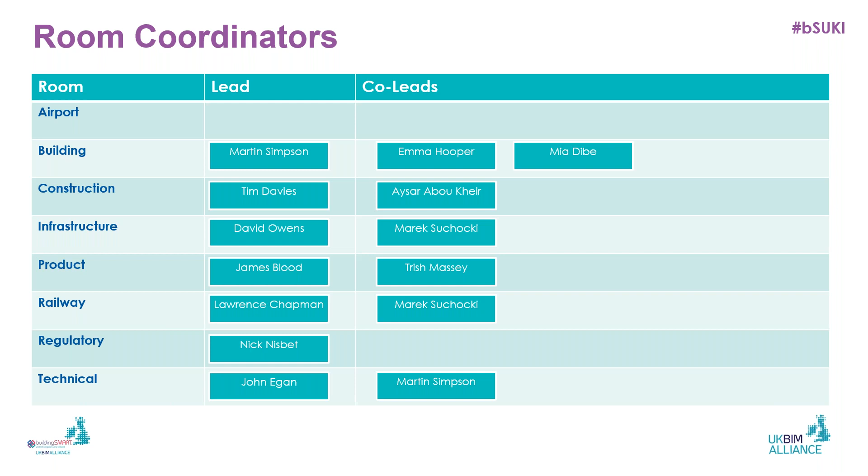As I mentioned earlier, the airport room is currently lacking a coordinator with any specific experience in airports, but we will assign someone internally within the committee if we can't find anyone new to join us. So with that, I'll hand over to Peter, who's going to give us a case study on the HS2 Euston Tunnel.

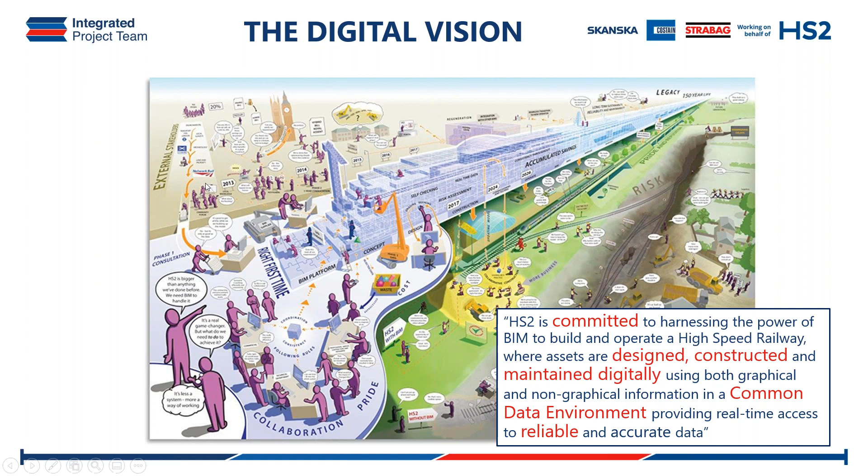Here's their strap line, which is in the bottom right here. It's got some of the buzzwords that we use, but essentially we kind of boiled it down to: we want to utilize BIM to increase productivity, reduce waste, and leave a legacy.

So specifically on this project, because of its size, we're probably running it more like you might do as a company. So we actually came up with some high-level strategies that we would like to achieve on this project, hopefully aligned with what our parent companies want and what the UK government are requesting as well. So we've just distilled it down into 4 to make it easier for ourselves, things we target, benchmark ourselves against, and measure against.

So one is trying to influence the industry, I guess, with hopefully some best ways. It's why we obviously like going out and doing these kind of events, try and get the word out there, see if there's interesting stuff that we can help with or influence.

And then the other one's about saving money, I guess. So we put on a pretty realistic expectation of a 1% minimum saving on capex, with a 2% target using these digital methods, and a prediction of the OPEX savings. It's pretty hard for us to do that, but we're asking HS2 to help us with that, where we would like to get between 5 and 10. Again, maybe not the highest, but we think they're quite realistic. And obviously, when you're dealing with billions, 1% is actually quite a lot of money.

And then the final one is upskilling for Digital Built Britain. So obviously a lot of what we do is about training people. That's probably one of the biggest challenges that we have. So we put a metric on that as well. We would like to train up our own staff, and especially the supply chain as well. So this strategy helps us to rally around something and try to aspire to be better, I guess.

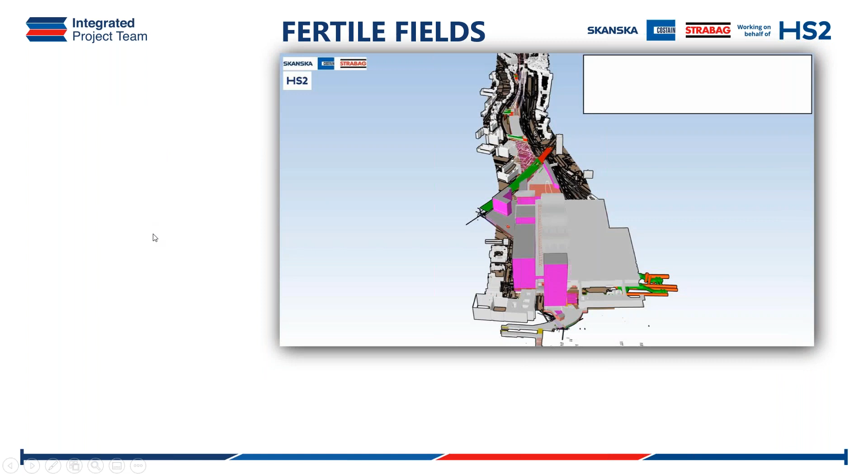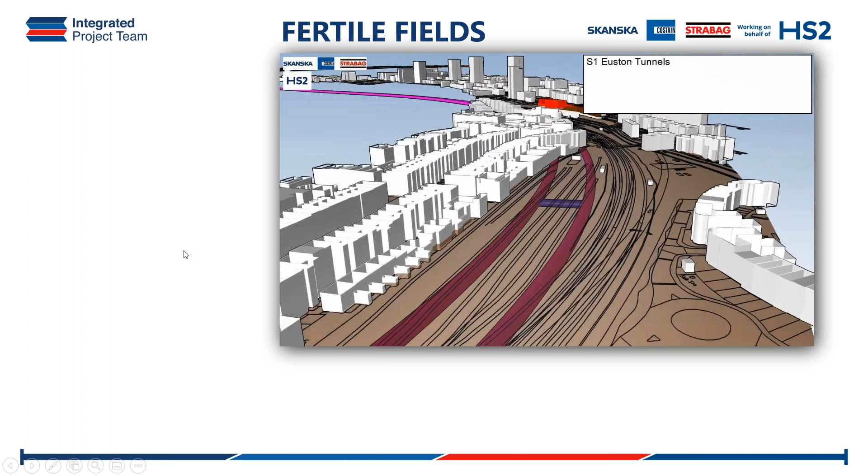So hopefully this will work. Here we go. So here, if this holds through, we produce this, which shows you what we're actually building. So we're responsible for about the first 26 kilometers of the route. It's mostly in central London, so it just comes out of Euston up to about the M25, and here's some facts down there.

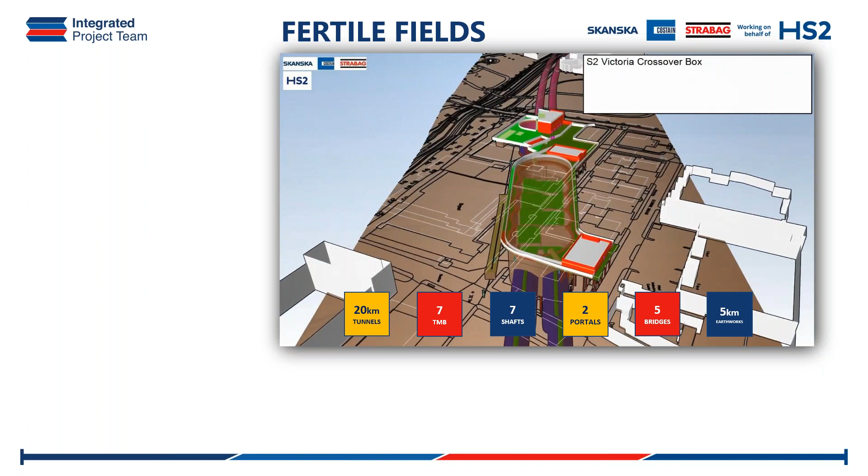So we've got about 20 kilometers of tunnels. That's a mixture of twin bore and SCL. We've actually got 7 TBMs, which is obviously a large amount. We've got 7 shafts, 2 portals, 5 bridges, and about 5 kilometers of earthworks.

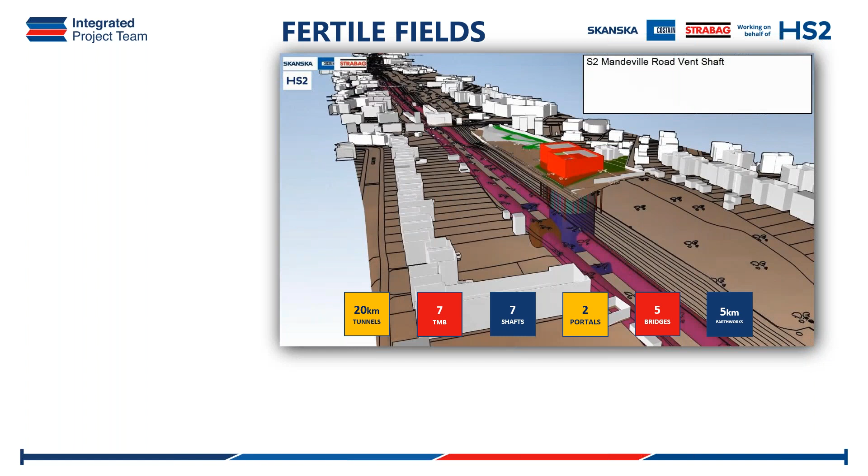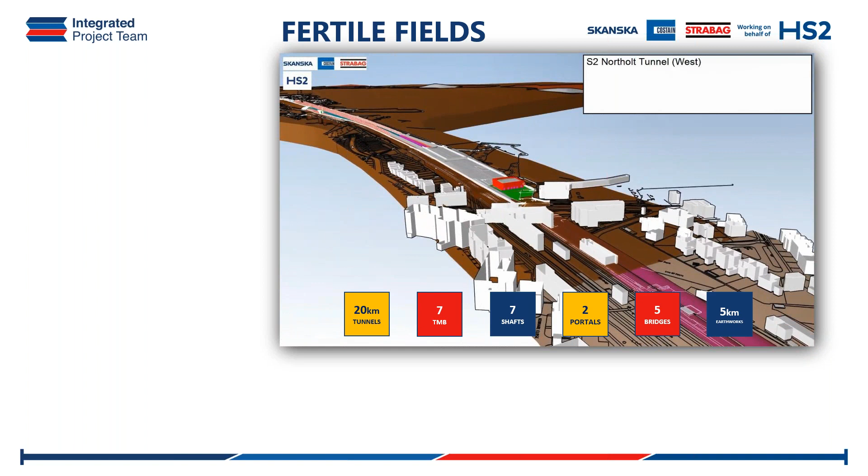I suppose one of the other challenges we have is because we're going through central London, we've got lots of interfaces, not just with the other HS2 contracts. We're kind of part of a big ecosystem, if you like, with rail systems and the stations, for example. But obviously we're interfacing with Network Rail, London Underground, TfL, the councils, and a lot of utility companies as well.

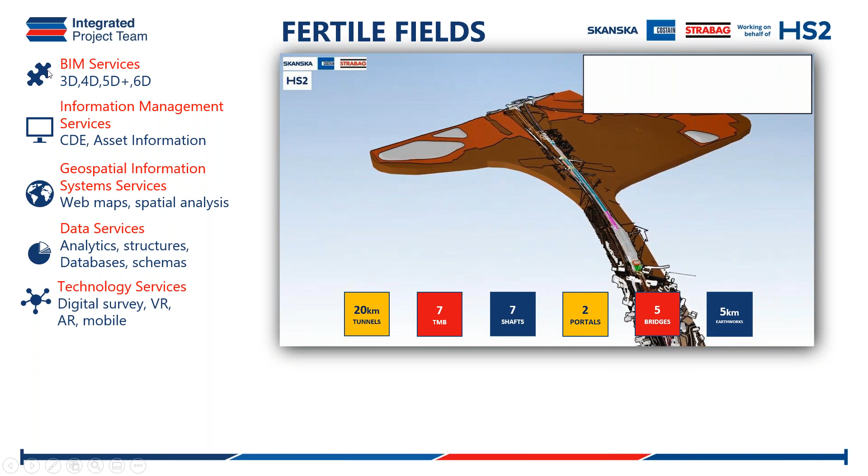And in terms of what we mean by digital, this is kind of our product offering here on the left. So obviously the term BIM can be widely used. So we offer those more traditional 3D, 4D, 5D, and 6D services, if you like, looking after CDEs and asset information. We also have got a really good GIS team. We won't go into too much of that today, but that's really helpful to us, especially in a big linear infrastructure project.

And then we've been investing quite a lot of time and effort into these data services, which I'll hopefully be able to show you a bit later, which is how we manage databases and analytics and stuff like that. And then also the cool stuff like VR, AR, and also mobile technology.

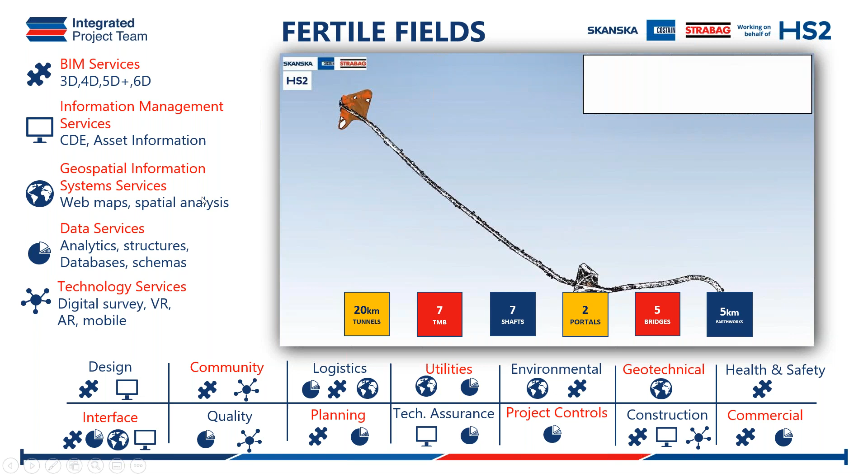And I guess it's a big project, it's a big team, as you've seen, and all of these different services basically can assist all of these different teams that we have on the project. So maybe when we think about BIM, we might think it's affecting design and construction, but for example, maybe not so much about quality in the field or project controls. So I suppose it's just trying to represent a global effort, and hopefully we can influence and help all these other teams achieve their goals.

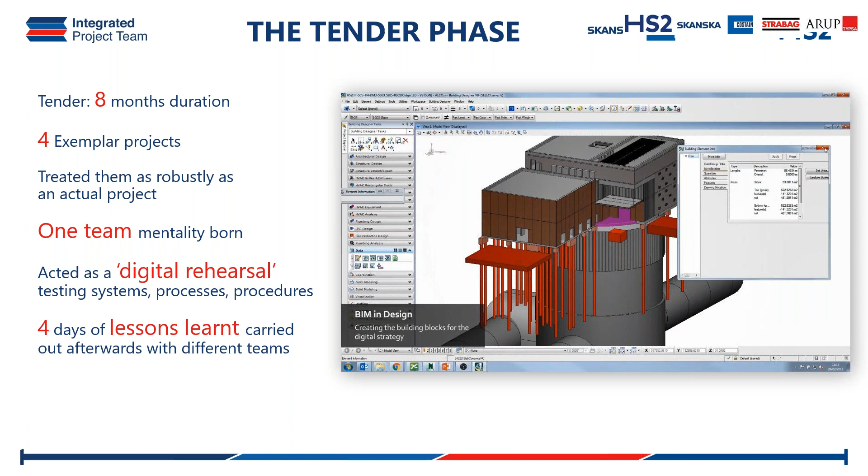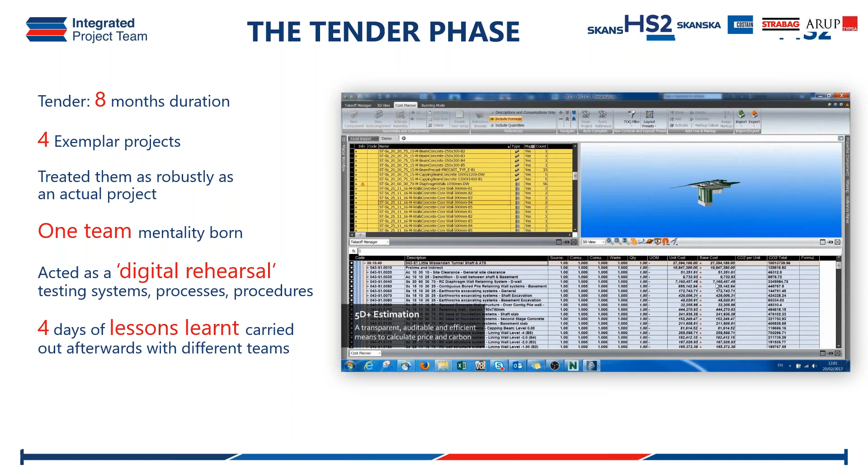So as I mentioned, I've been personally on this project for a long time, and we produced this video as part of our tender response. That was probably about 4 years ago now. If anyone's been involved in a tender, we were quite lucky, we were actually able to test quite a lot of what we wanted to do during that tender process. And then we've been able to learn some of those lessons through 8 months of tendering, essentially, and deploying them on the job. I think that was a really useful time for us to learn in a controlled environment. So what I'll show you a bit later is just an extension of what we trialed back then.

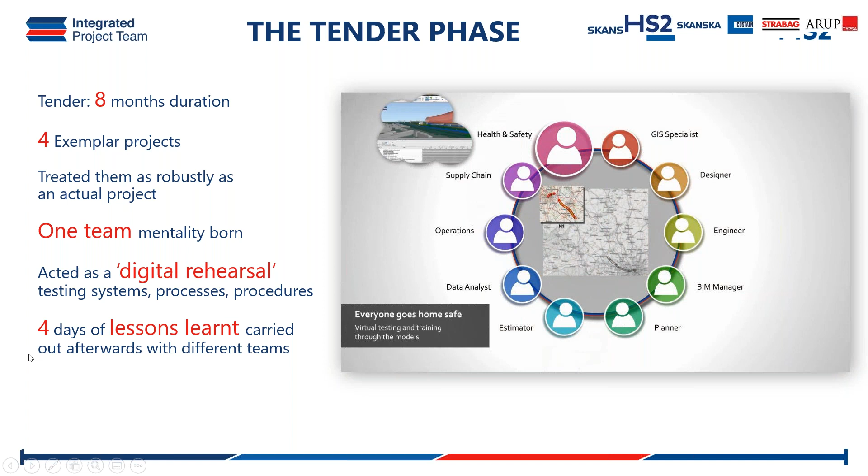Hopefully here you can see it was a joint effort with lots of different team members being part of this, and we tried to get a good one team mentality during that tender. From my point of view, what was maybe most impressive, we actually carried out 4 days of lessons learned afterwards, which was tiring and time consuming, but we basically worked out what we wanted to do before we got into contract with HS2, and we were able to execute that before we started officially. So it gave us a bit of a jump start, and that was really, really helpful to us.

In terms of authoring tools, because it is a rail project, we are using quite a lot of Bentley tools. They're pretty standard, I think, due to people using Power Rail Track for the alignments and stuff like that. So we have kind of aligned ourselves a lot with that. But obviously, we've been using the IFC format to drive a lot of our downstream processes, and I suppose that's kind of maybe a bit unique. Not sure if so many other people are doing that.

We use a lot of basically configured information, if you like, which is housed within our CDE, to make sure that all of this information produced using these tools is very consistent. I'll explain a little bit about that later.

We also use a lot of this product called FME, which is an ETL tool - that's extract, transform, load - and it's a super useful tool for doing clever stuff with data or geometry. I don't know if people are too aware of it, but we use it a lot on the project, and we've seen many, many benefits. You can see some amazing cool stuff with it. Definitely recommend everyone try that out if you haven't.

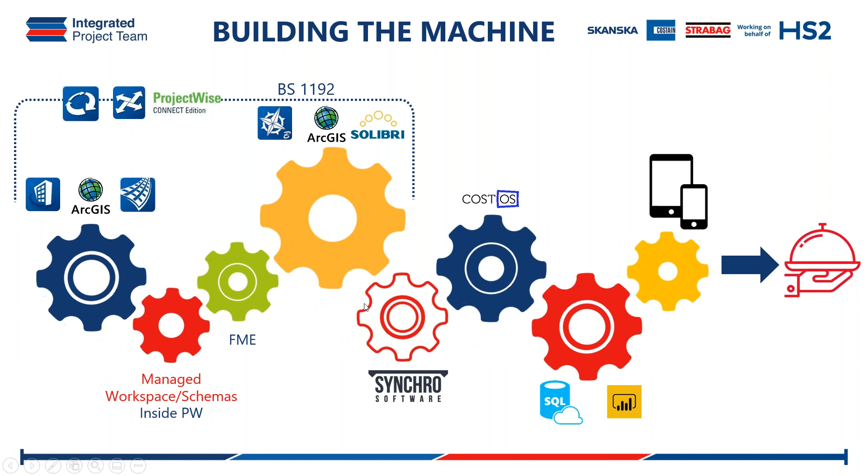Cool, so just a quick slide. When we were setting up the job...

We worked quite a lot with our IT team and data architects and systems architects. If you want to really align structures to do effective reporting or integration, you really need to configure many systems so that they have common structures. So we spent a lot of time at the beginning of the job as a group trying to come up with those common data structures. And it's not just about design or engineering, it might be about commercial, or your document management tool, or your timesheet management tool, or the way you do your accounting and stuff like that.

So won't go into too much detail, but we spent a lot of time as a group going outside maybe your traditional BIM sphere, so that we could make sure that when we tried to integrate with other systems, that was effective later. For example, that's your estimating system or your P6 for your program as well. So yeah, that's a complicated piece of work, but definitely worthwhile that we found.

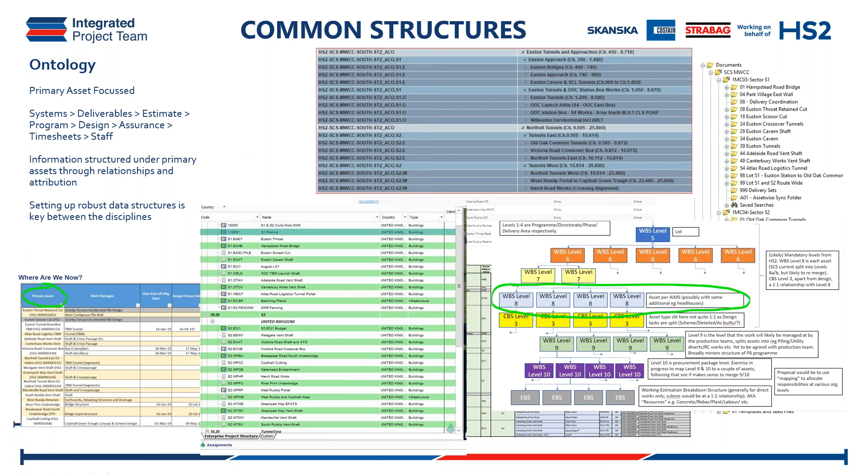Okay, so when you start off a job, it's not all looking great, it's quite boring at the beginning. HS2's, they just had their standard EIR like you would expect. That probably was one of the most onerous or challenging set of requirements that I've ever witnessed. I've been working in the industry for quite a few years now on big other blue chip clients, and HS2's requirements certainly are very challenging.

That's why we've had to develop all of these things and do all of these things, because that's what they asked for as well. Obviously then we wrap that up in one of our several BEPs that we have. This one is interesting - we actually did this as a joint effort with our design house, because we thought that was a bit more effective in working like that.

We kind of worked out this through the MPDTs, this very structured approach, which we implemented on these other systems that I mentioned before, where we moved from our assets down to our model items, down to our elements as well. And what we did then, which is maybe coming into the fore in rail a little bit more, but maybe wasn't so common before, is creating our component library.

So those sort of Revit users or people working in oil and gas are very used to this, maybe not so much in some other linear infrastructure, but we realized that if you wanted to have very consistent information, you couldn't just let people run amok basically. So we configured a library of parts, if you like, or specific components, which we could then control that information really consistently.

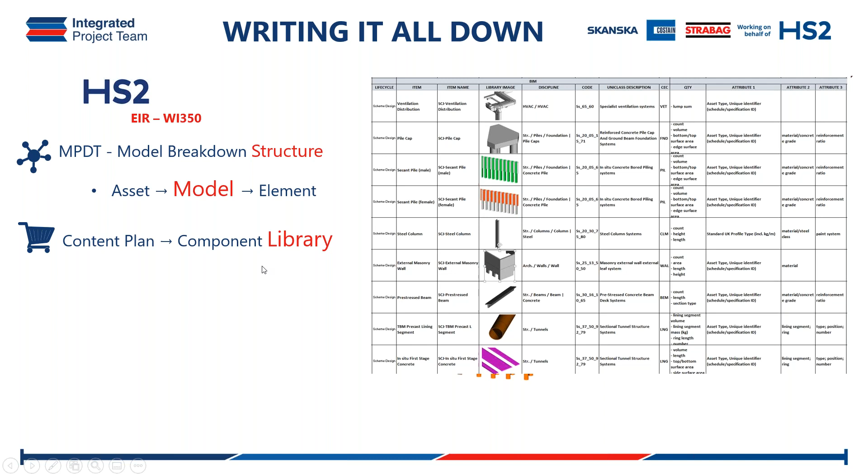And then we did the standard things about the LOGD, and we also came up with these extra attributes that we knew we would need for downstream processes as part of an extended LOI, and we use the extended property schema basically on the IFC. So we control this schema in our own systems, and that basically gets burned in as another table in the IFC schema. These essentially allow us to do some extra linking, and it's to do with the HS2 requirements as well, so that's been helpful to us.

Then that was wrapped up in some guidelines, it's like a manual, if you like, to make sure you're doing things in the right way. The design house did that, which is great. And essentially it ensures consistency, and that's really the key word for us. If you want to automate anything, then your data needs to be consistent, and maybe historically it hasn't been, and that's why we've all struggled maybe to do some of these more interesting things that we can do.

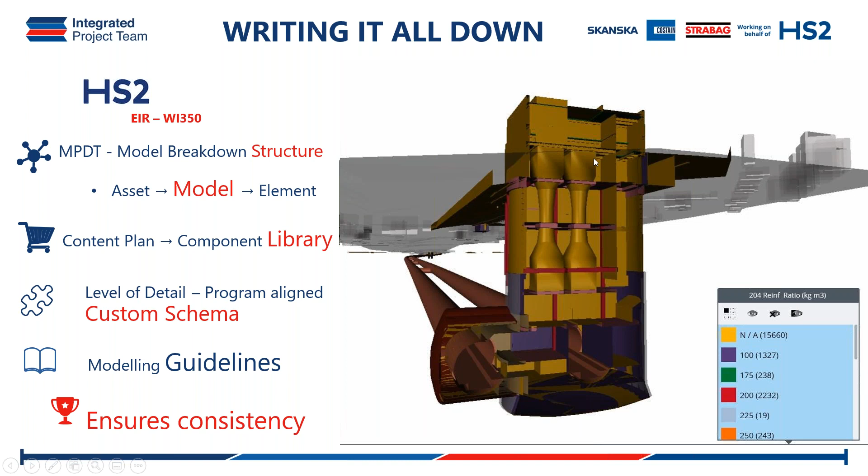So hopefully that allows us to have a nice looking model. It looks great, but obviously it's full of really useful information that's useful for the teams. And this information is really what's driving a lot of our processes, and this is what's useful. The graphical side has its own certain life cycle, but we've realized that the information is really what's valuable here.

So we spent a lot of time basically making sure that this data was correct, essentially.

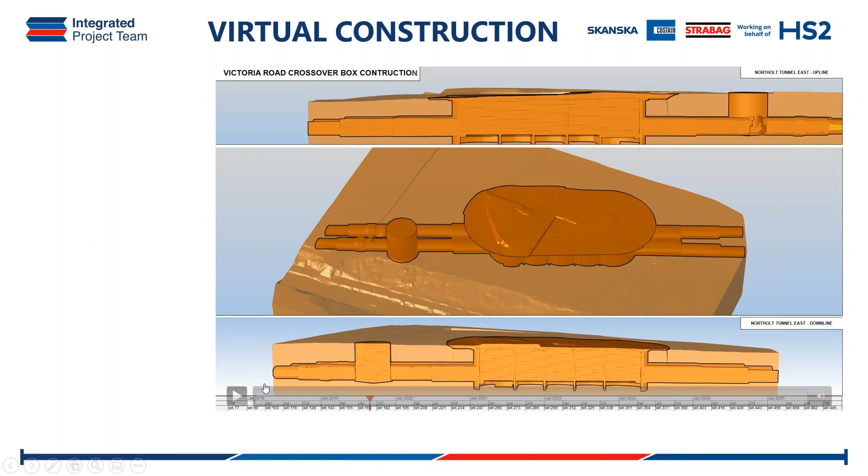So just a little bit about how we've been using 4D throughout the years to virtually construct or plan our works. I'm sure people have seen this before. Essentially what we're doing here is linking up our program with the models, simulating the plan. You can definitely plan your works, especially on these massive assets, a little bit more effectively, and do your testing in the virtual environment rather than on site.

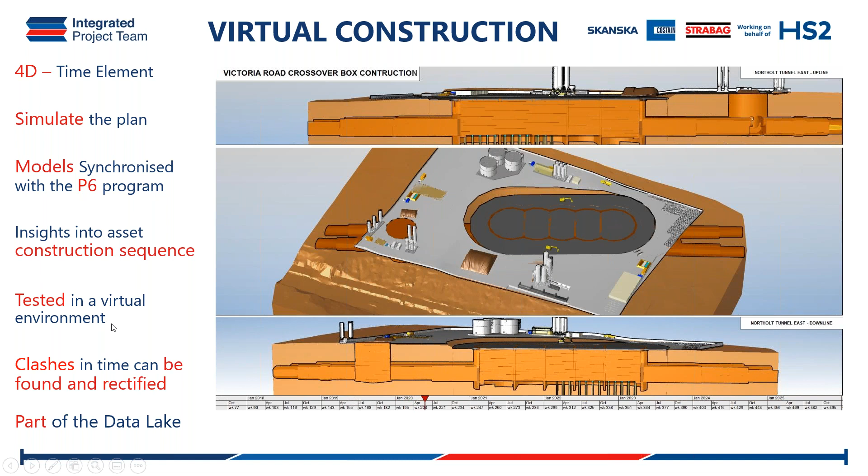We've been using this technique for a few years and definitely found lots of clashes which we probably wouldn't have found before. You can manage that out way before you've hit site, and that's been really helpful.

One of the interesting things we've been focusing on that might not happen on some other projects is to do with these dig sequences and excavation. Funnily enough, excavation is a massive deal for us, being a big tunneling and geotechnical project. There's a lot of money and time in those excavations, so we do quite a lot of quant takeoffs and analysis using those items linked to the program to understand the logistics of how we're trying to move away muck and stuff like that. I'm sure you've seen this before, but we found it very useful.

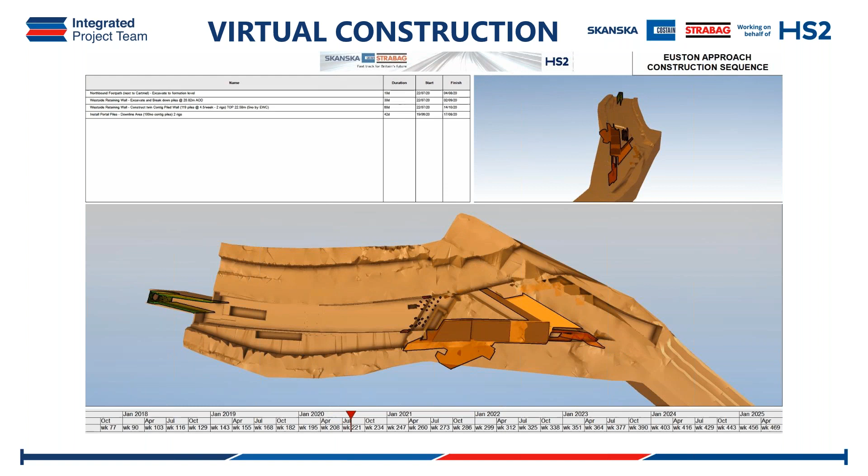Here's just another one that we've been doing. This is around the Euston area, and this shows maybe about a kilometre's worth of works. There's a road diversion, we're building a big portal as well on the left-hand side, and there's some SCL as well.

This was helpful for getting the teams talking to each other, I guess. We have different structures owned by different teams that don't often talk to each other. These sort of techniques help everyone to kind of come together and collaborate a little bit more effectively.

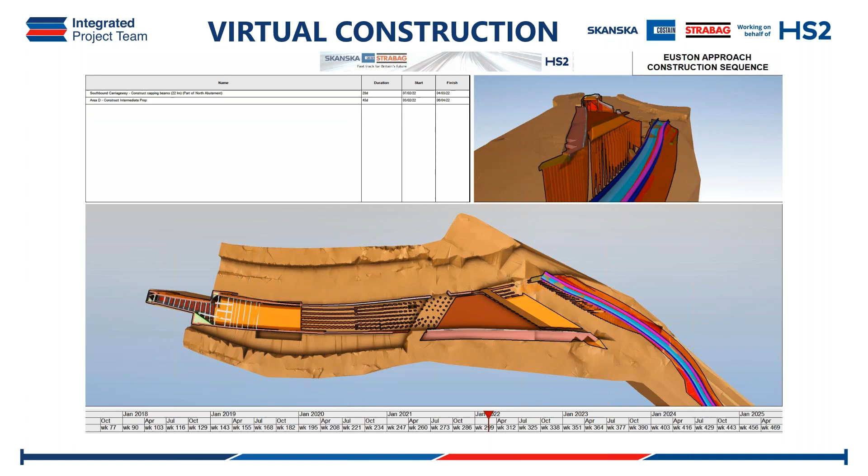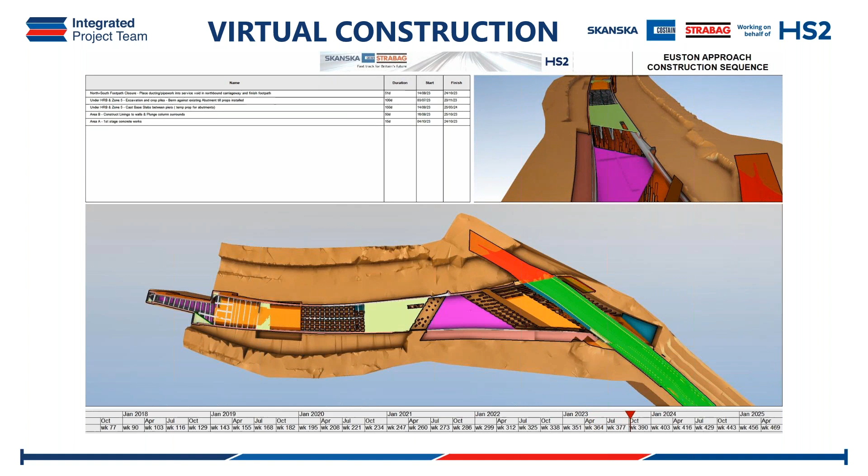Interestingly for me, we've also been using these animations, or sequences, as part of our community engagement with local stakeholders. There's a lot of people who live around here and they deserve to understand what's going on. Historically, when engaging with non-technical stakeholders, it's not always the best quality information. These kinds of sequences are a lot easier to understand for a layman, and more detailed as well. So hopefully that transparency is more effective, and they've enjoyed understanding a little bit more about what we're trying to build.

Okay, moving on. One thing that we trialed out in the tender that we really wanted to focus on is this notion of 5D. So if you don't know, 5D is where we're estimating using the models essentially. It was something we really wanted to focus on during the tender, and heavily during our estimating phase.

I don't know if anyone's been involved with estimating before, but it's an interesting approach, shall we say, how it's done at the moment - essentially it's very siloed. One of the big issues we found is that the impact from other disciplines is not visible, and there's a lack of transparency between different departments working - your commercial function, your design function, and your environmental function. If something changes on one of them, it's a very long and laborious process to change it in the others.

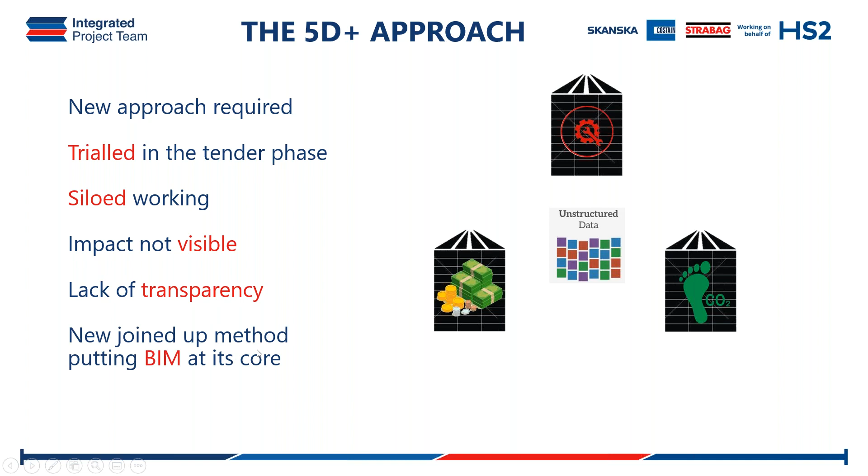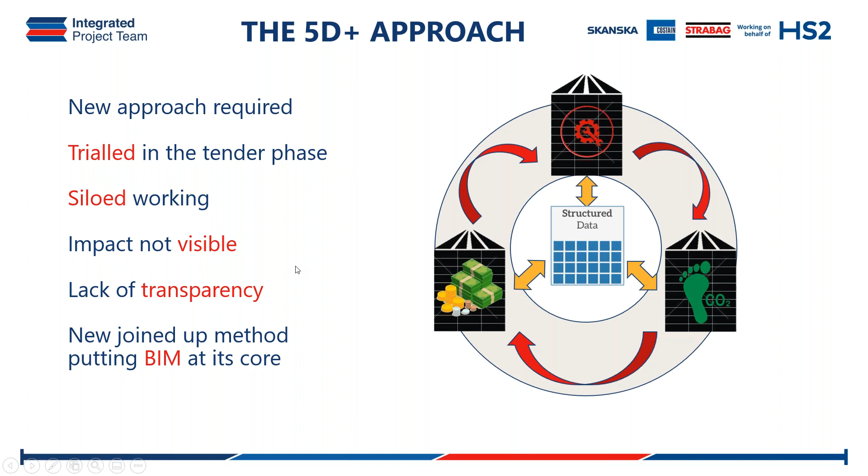There's lots of reasons for that, but we think one of those reasons is this kind of unstructured data, which is basically feeding all of these different decisions. So we thought maybe if we put in this more structured data, which BIM gives us at its core, it allows these disciplines to talk a bit more effectively to each other. So that's hopefully why we tried to do this.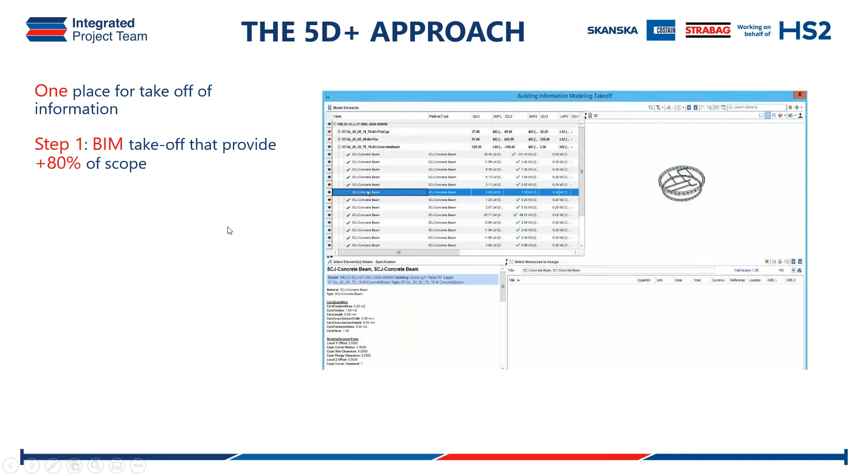Basically our methodology is we're just using a product which is essentially a database to do all of our takeoffs. The models basically made up about 80% of our direct work scope, and obviously there's still a bit about 2D - we always say, can we do everything from the models?

Unfortunately, not at this time, but we thought 80% was pretty good going actually. And then there's obviously still some allowances for overlap or overbreak and extra stuff like that as well.

One of the benefits you get from working in a more structured environment is you can estimate more effectively to the standards. So we're using CESMM4, and HS2 also have their own cost breakdown structure as well. And interestingly, we had to change the way that we estimated actually.

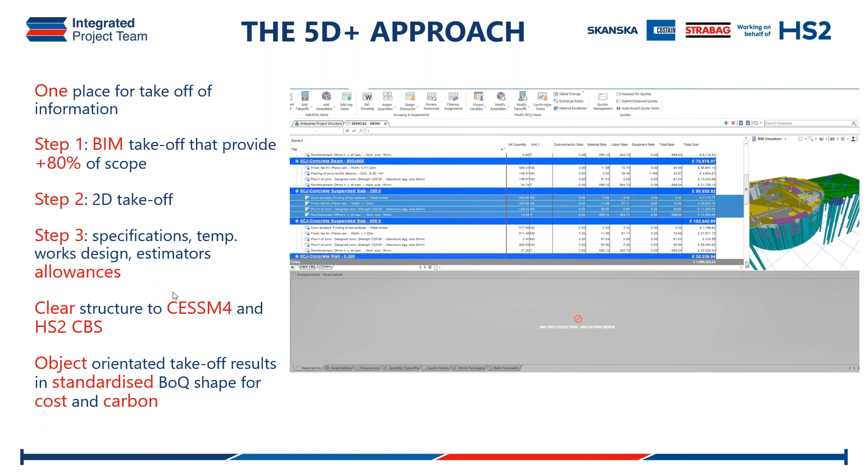Traditional estimates are done using a trade-based approach. But because we were using models, we used a model-based approach essentially, and that allowed for a really standardized bill of quantities, which I'll explain later. It was massively much more efficient. So I've got a little video here, which hopefully shows you some of the processes I just mentioned, and hopefully you can see the speed and the accuracy we're able to achieve.

So you can see here that the IFC file is being loaded up.

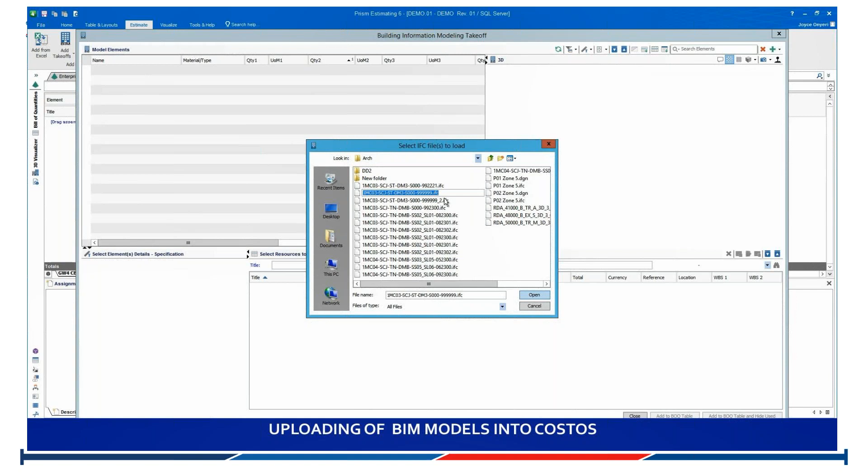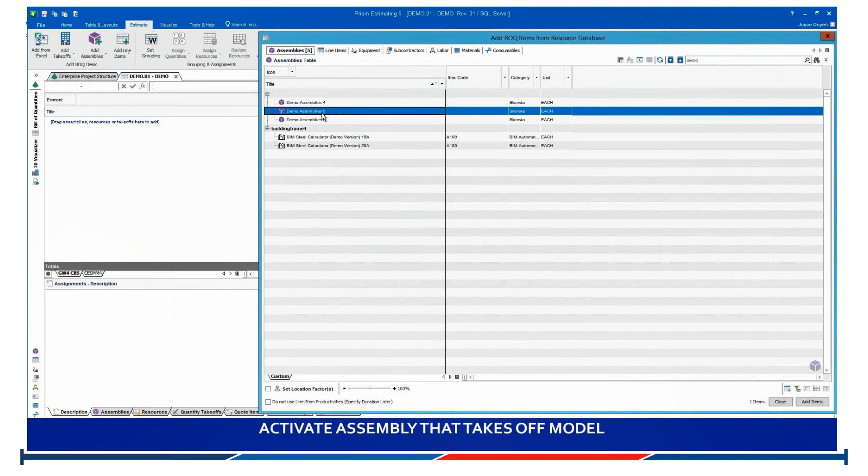Yeah, and basically, if you remember earlier, we mentioned how we structured the information using libraries, we were able to script this out essentially, which allowed everything to link together really quickly. If you were trying to do it manually, obviously it would take a bit longer, but because of that consistent information, we're able to do it a lot faster than we've historically been able to do.

So here you see it's picked up, for example, the thicknesses and the grades of concrete and reinforcement ratios, etc., and the types of objects that we're measuring as well. And that's straight out of the data inside the models.

Can't spell slab, so apparently.

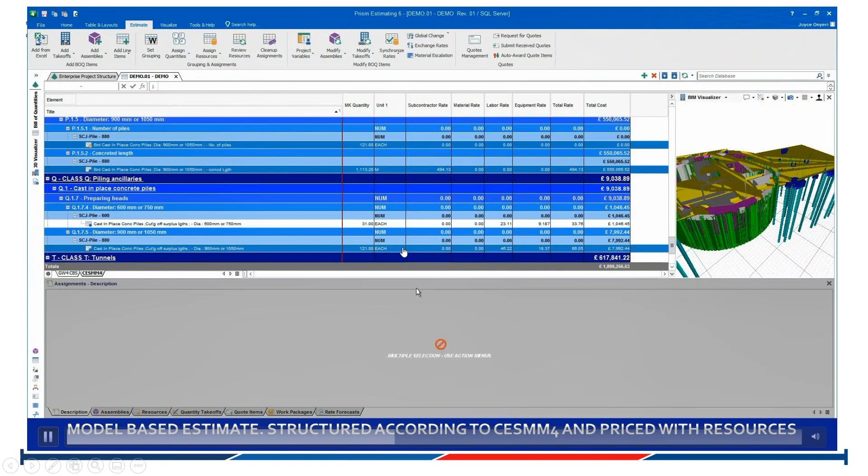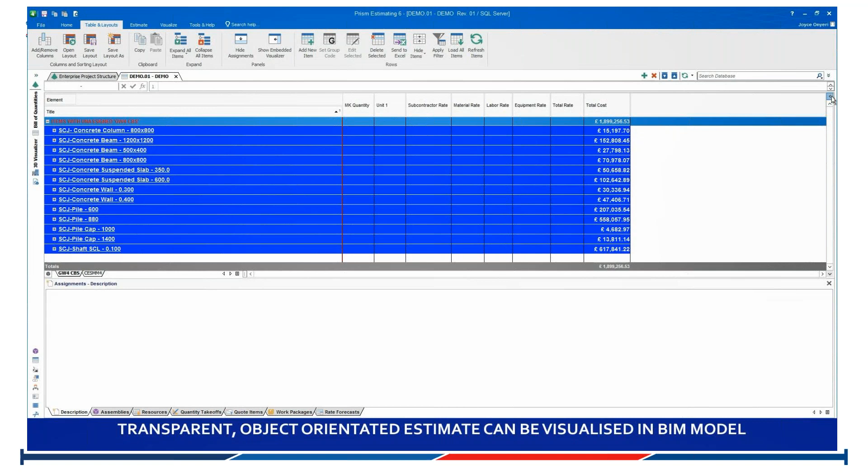And yeah, it basically gives you your full breakdown and your costs. Now, this is a bit of a cheat I'm showing you here, because although we actually proved that we were able to cost directly as well, our estimating team weren't the happiest about that. So we had to just settle for the automated takeoff, and the estimators actually added the cost. Not going to go into why that happened, but definitely showing you what can be achieved using this.

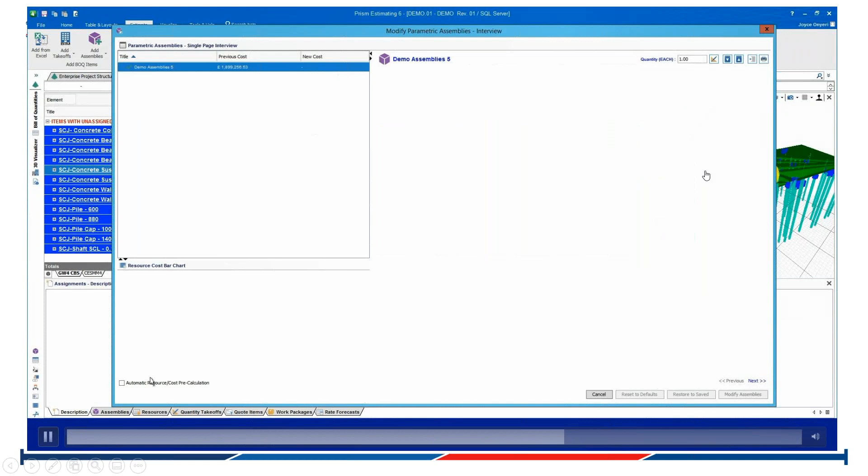So this is really interesting to us. This is definitely a much more auditable and transparent way of doing this. What was nice is when the client asked us to validate the quants, we were able to just send them these files, and that's so much better and more transparent than traditional methods, sending someone a stack of drawings and a few Excel spreadsheets. You can understand really what's going on.

And it's a much more efficient process. We reckon it was about 80% faster than the traditional methods. And we did it with a team of about 2 people, or 1.5 people, rather than a team of 12. So it just shows you one of the kind of transformations that you can achieve. Really good use case there.

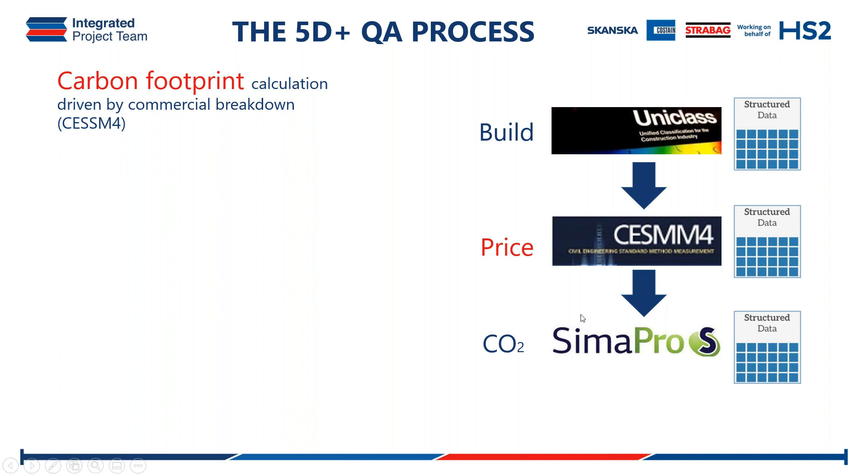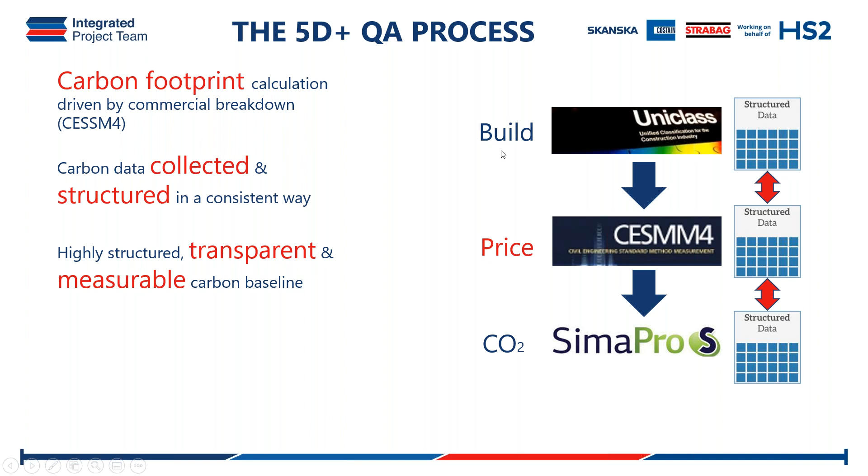And then finally, an added benefit we found is that we were able to calculate our carbon using this process as well. Essentially the way that worked is we aligned some different data structures. So we've got our design, which is in Uniclass. We've got our pricing, which is done in CESMM4. And then we have our carbon library, which is a mixture of the HS2 carbon factors and Bath University, I think. And essentially we were able to do a schema map on all of these different structures, which allowed us to push information from here down to the carbon quite quickly.

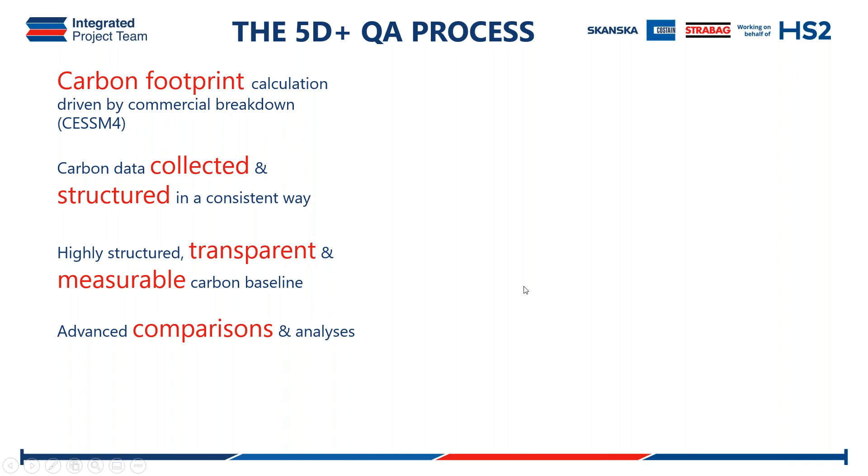And then that allowed us to do quite quick carbon analysis. Again, normally it takes quite a lot of time to do that. We were able to pick it up in about a week, and produce some fancy dashboards and stuff like that. But I suppose the biggest thing of note was that we were able to feed back on the design, on our carbon performance, and actually make decisions based upon that, where maybe before you wouldn't have had the time, or it happened a bit too late to do that.

So a great example of that is, originally the design was going to have a lot of diaphragm walls.

It's a pretty traditional construction technique, and one reason we changed to more contiguous piles was to do with the reduction of carbon. There was obviously a reduction in cost as well, but traditionally if you reduce cost, you increase carbon. That was an interesting venture for the team, maybe something they hadn't seen before, so definitely something we're quite happy with.

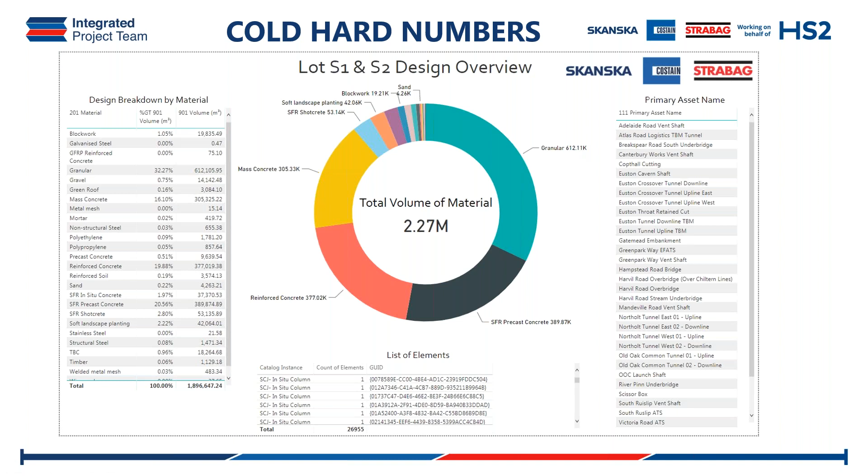What we're going to go into now is that although we had our models filled with information, we found different techniques to analyze them. We found ways of extracting all this information, storing it on databases where we use a bit of BI tools to help us analyze it quickly on such a big job. I'm just going to quickly show you that because it might be useful to you.

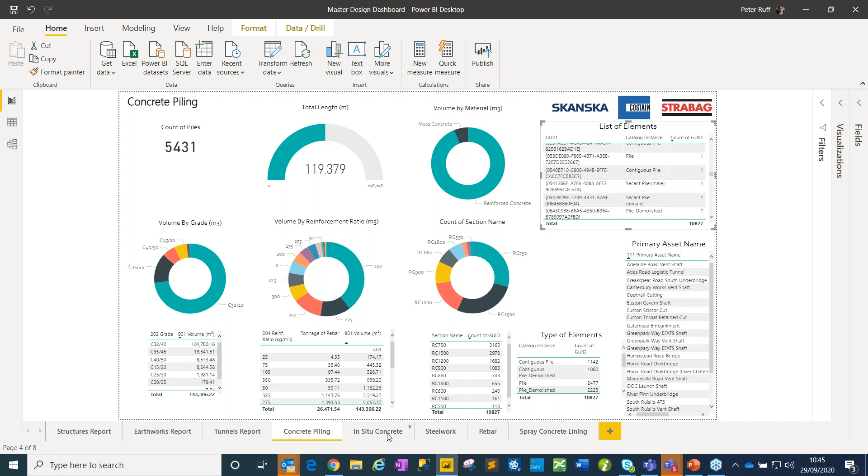So we do one on concrete. If we want to find out what's going on with our D walls, that tells us quite a lot of information there. Steelworks is obviously always quite structured, so that's a good one to do. We have all of our different types here that we're using. It tells us our weights and where they're located and stuff like that as well. So this kind of information, as you can see, is a lot of stuff going on, but it's quick to analyze.

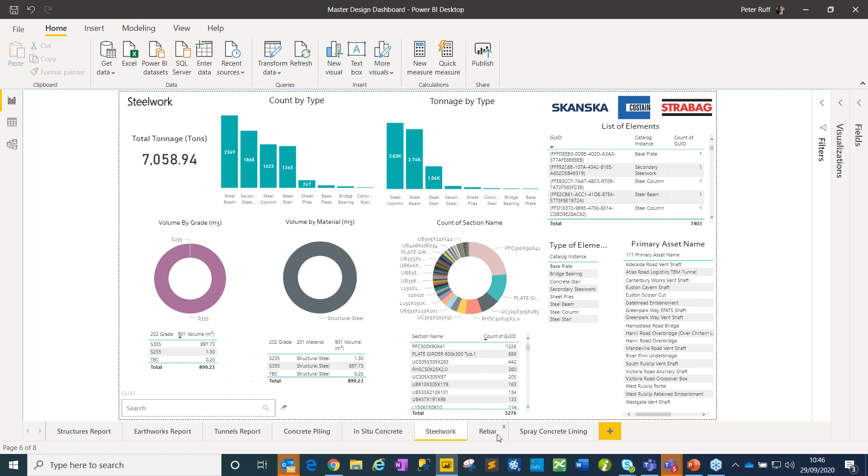We also do stuff like analyze impacts over time, and we also analyze changes through this. Again, it's just made our life a lot quicker to basically work in this way, using these kinds of big structured information.

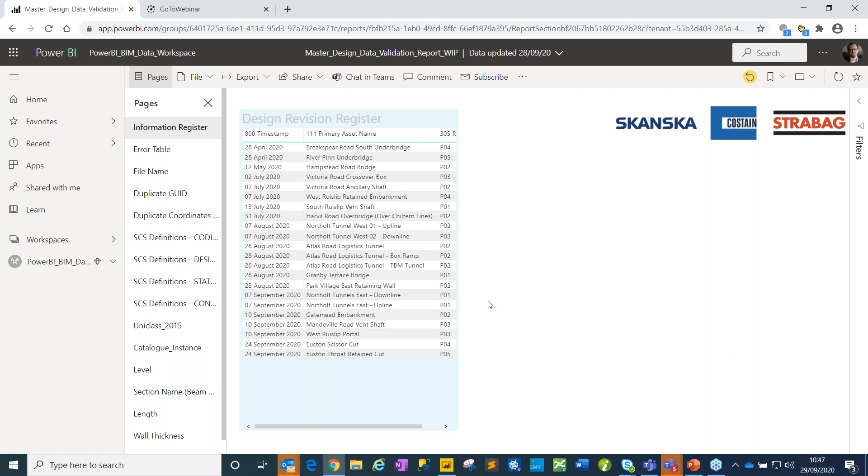What we're also doing is we now check the quality — you can see this screen as well. So when you start working, basically the model and the information is really important to us, so we need to make sure we're checking its consistency. Essentially, again, we use these kinds of BI tools to help us with that. So we just set up something that basically looks for errors in the data. It's very easy for us to find out where the issues are.

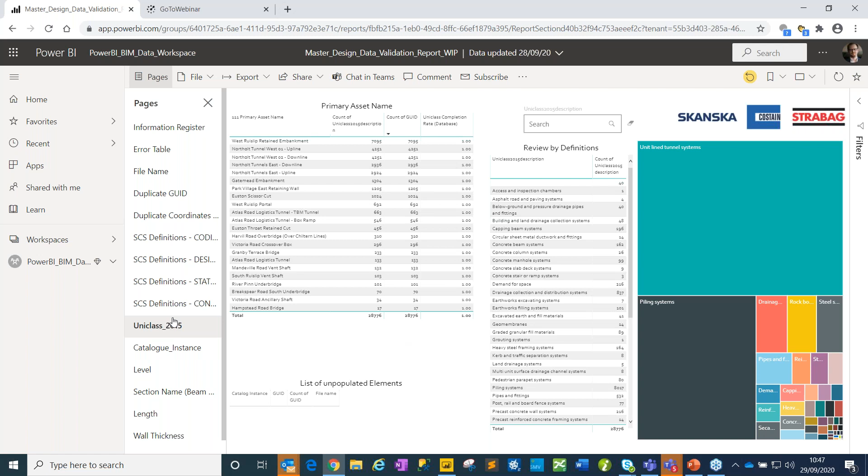So it allows us to manage this quite big job using not a huge team, because we're able to use the data to help us. So yeah, that's something else we've been doing as well. I'm going to put it back to the presentation — so yeah, just a bit on that.

Essentially, what that allows us to do is integrate that data with other systems a little bit more effectively. We can report out of it really quickly, as I said, and that information is used for a multitude of things — I can't name them all, but it's very handy for us. So at the moment, what I showed you is a look into what we call our BIM data lake. We called it that because we thought it was a cool word — it's not much else than that.

At the moment, we've got about maybe 120,000 assets, shall we say, or rows of data, and that equals about 12 million data points. So it's a vast data set, but hopefully you could see how we've used Power BI, and you can actually analyze 12 million data points pretty quickly. And that represents about 3,000 model files at the moment, which encompasses our scheme design and our detailed design.

So again, it's this kind of macro thinking, but you're able to drill really down into the information. When you start moving into this way of working, it's a bit different from a file-based approach. For example, we've had to introduce suitability codes and revision codes against the objects rather than against the files, because we're not so interested in the files anymore. So it's maybe a slightly different way of working, but very helpful to us.

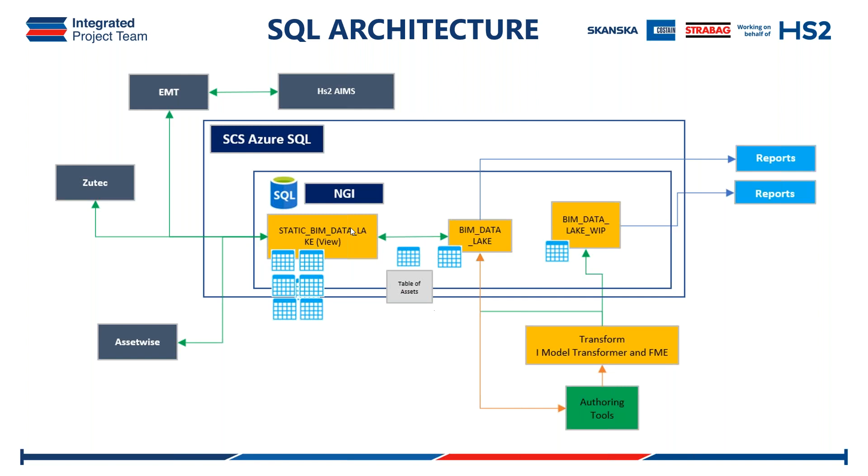Yeah, hopefully that was of use. Just a quick one, I thought I'd mention something else that we're using the IFC information for. As I mentioned before, we use a lot of GIS on this project. If you don't know, GIS stands for Geographic Information Systems, and essentially, maps.

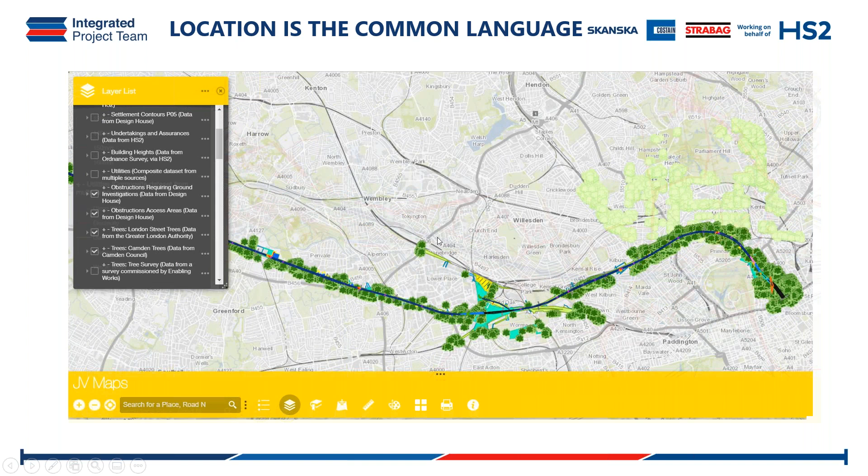We use it a lot for logistics and utilities and stuff like that, also a lot of settlement impact, environmental data sets, and as I mentioned before, lots of utilities on this route as well, and managing third-party information from the likes of TfL and LU. But one thing we've developed ourselves is what we call GeoBIM, which is kind of like a mixture of BIM and GIS.

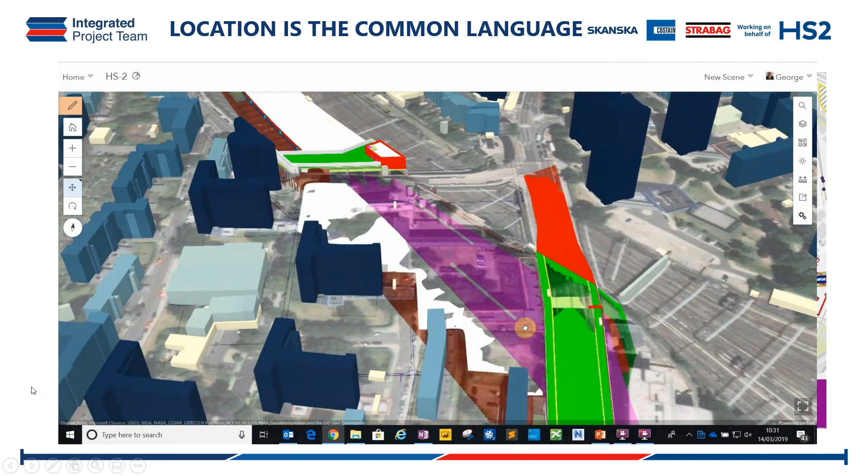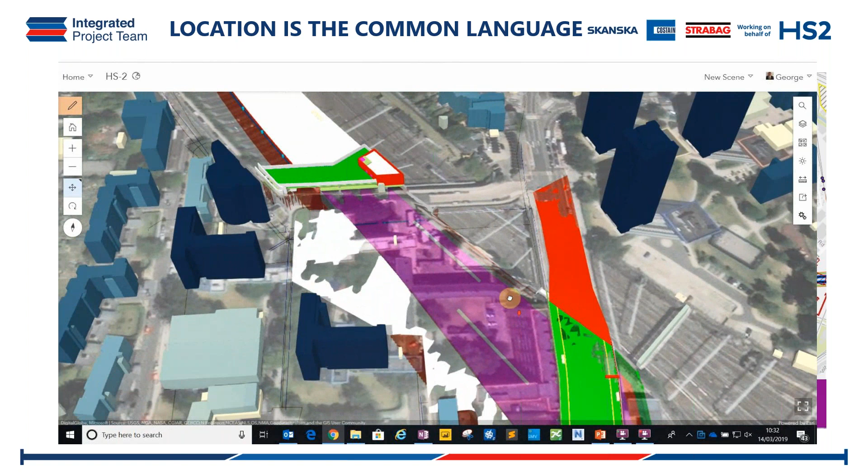And this uses the IFC files actually. So this uses the latest Esri technology, which enables this 3D GIS, and we were able to come up with a transformer which converted the IFC file format into something that can be consumed by Esri, by this product basically. That's been really helpful for us as well. You're kind of combining the best of both worlds there - with shape files, which are easy to get hold of, and that very detailed BIM information.

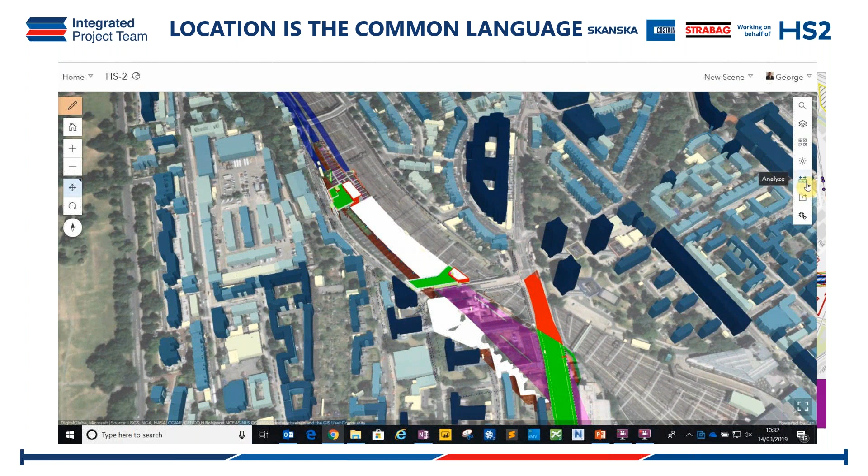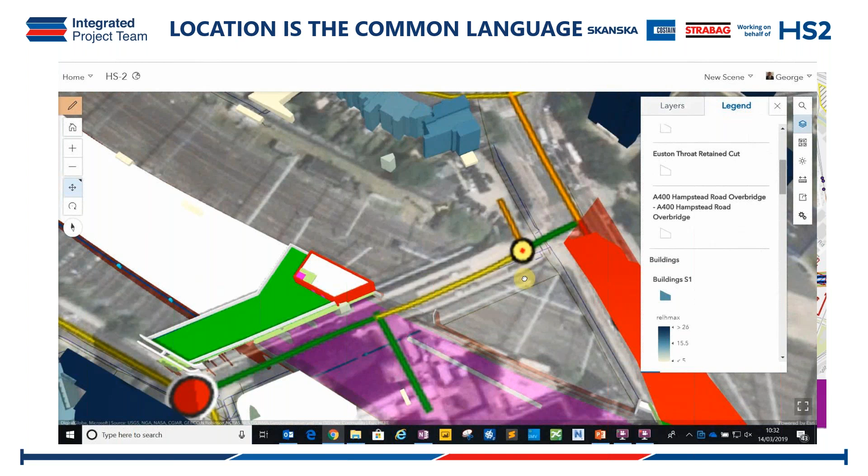We've seen 3D GIS being used in other areas, but maybe not to the level of detail from the IFC files - it tends to be more massing models and stuff like that. So it's something we're quite happy with. Works quite well. Obviously you get all the integration with other services like live traffic information, etc., which is helpful. And we're able to use this, for example, to analyze sight lines for residents quite effectively using the viewshed tool.

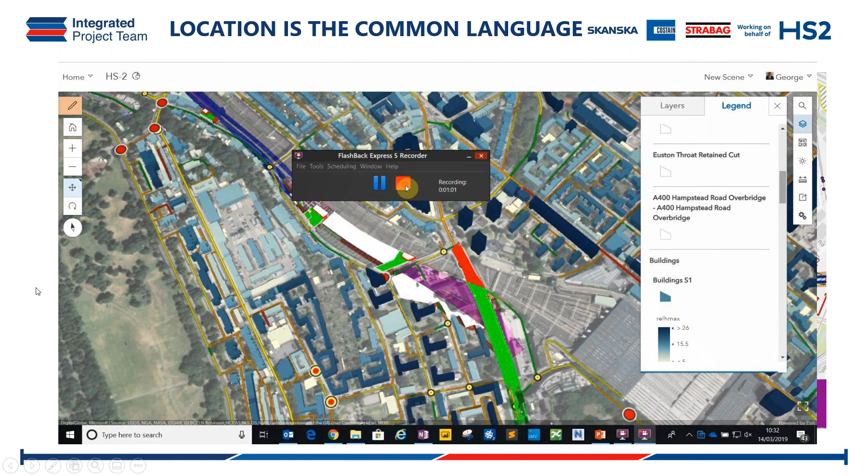And also we were able to work out hazardous material quantities for our estimate as well, using some borehole data. So again, we're trying to use the IFC files and that data in many ways and shapes as possible to influence us. Essentially those IFC and federated files inform our 3D GIS, and we also create the 2D footprints out of them as well. So hopefully reusing information many times for what we needed to do.

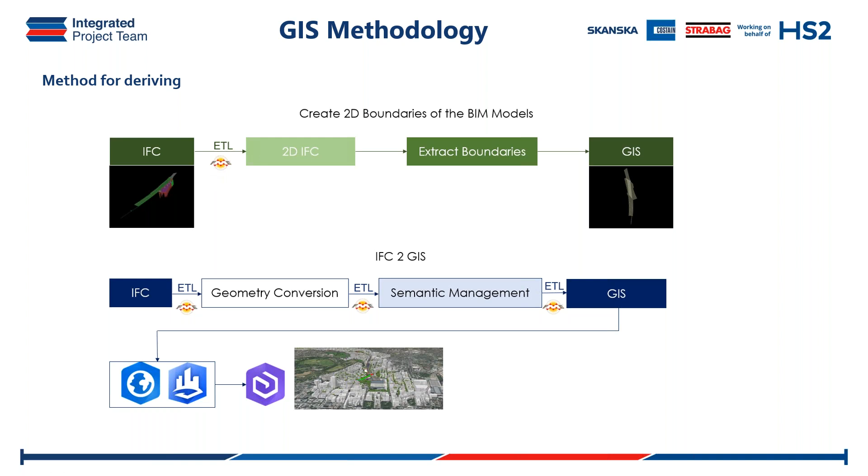Just a little bit about how that works - I won't go into too much detail about it, but essentially it heavily uses FME, to cut a long story short. So yeah, definitely a product to have a look at, guys, as well.

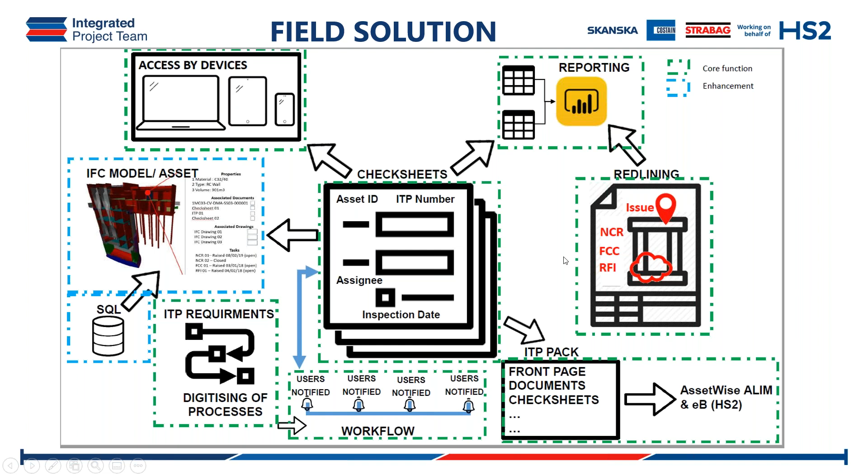Just a final one here, I'm going to quickly explain our mobile solution - this is our field solution essentially. When we're going out using tablets and inspecting the works, we basically created this kind of wish list, which we gave to our suppliers. We're using the IFC model as the backbone of what we're trying to build, and we wanted to make sure that the data we've harvested is reused on site, linked to the check sheets. And that's what we've deployed.

So this is our mobile technology, and we upload those IFC models. They're linked to that SQL database you've seen, which draws down that information. What we're able to do is reuse that information on the forms, so we're able to script a lot of that out. So when you click on something, you don't have to fill in a lot yourself. The idea is just to reduce time and errors.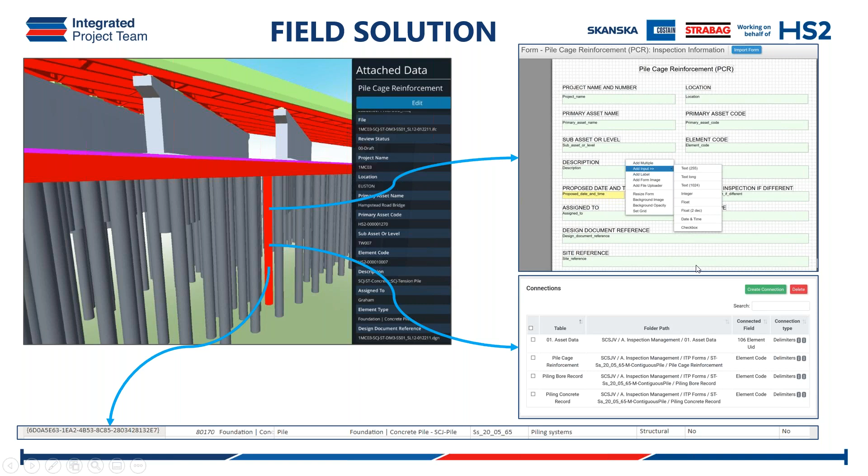Again, it's consistent information, so the scripts work really, really well, and the team's found it really helpful. We've been using it, deployed it about 6 months ago. There's lots of work to do with it, lots of extra stuff we can do, but it's been working really well, saving lots of time for us, and hopefully that information will be a lot more consistently structured than we've seen before.

So just a final slide on some of the benefits we've seen using this. We were kite marked by BSI through Skanska, that was a few years ago. We've got our data consistency on key fields up about 99%, which is really high. As I mentioned before, the 5D process took about 80% less resource than you might traditionally expect. Using 4D, the planners reckon they can plan about 30% faster.

We saved quite a lot of drawings at the beginning of the project - we didn't produce any drawings for about the first 8 months because we didn't need to. So hopefully we've saved quite a few of them, not enough in my opinion, but there we go. We've also trained about 500 staff as well.

And luckily enough, we've got a few awards as well. In 2018, we won the Bentley Year in Infrastructure. The 3D GIS I showed you won a map award in Esri, I think in 2019. And then we won 2 awards at the London Construction Awards last year, I think it was. So hopefully some interesting stuff there, and some bits and pieces that are of use to everyone. So that's me, and thank you very much for your time, guys.

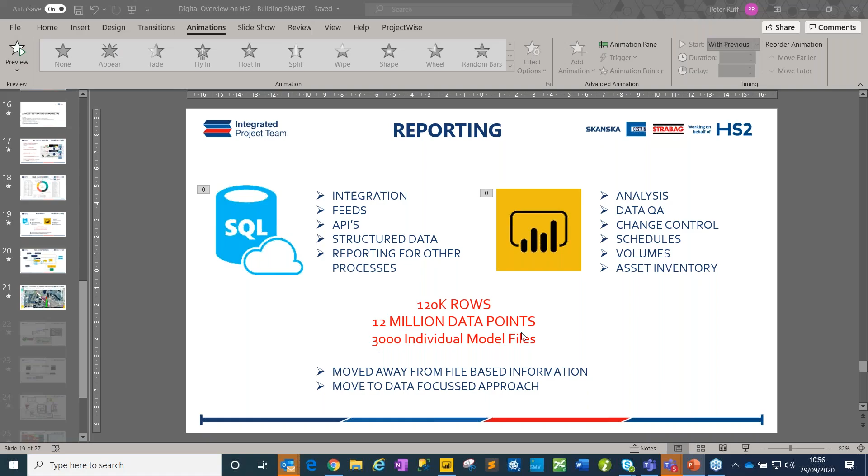Thank you very much, Peter. I've personally found that really interesting. I hope all of our listeners and viewers online are also enjoying that. It's just a great case study so far, to see how far HS2 have come and you guys have added value to that whole process. I'm sure many people are keen to dive in and do something similar.

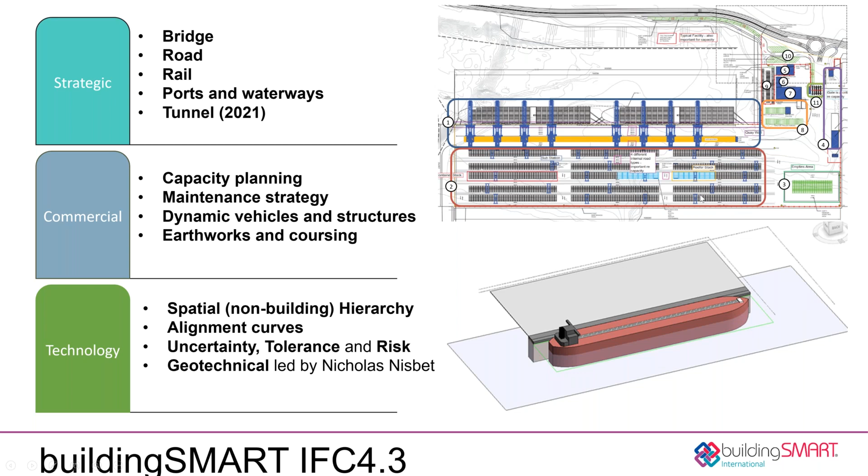I think particularly for contractors and clients, to say that there is one vision, one representation of both the building and infrastructure world - I can remember hearing 10 years ago a construction company saying they would engage with IFC when we could do both building and infrastructure. So now is the time.

That development - we would like to see the UK engage with it. And so we have the infrAIR project proposal, which would like to bring together the best practice for a common UK and Ireland asset information requirements for infrastructure.

Reach out to HS2 and the different lots being developed there, but also Highways England and Network Rail and TfL, and bring together that best practice so the industry can share, learn and benefit from the consistencies. We can see the advantages in HS2 of the size of the project and the resources, and it would be really good if some of those lessons could be abstracted and made accessible to those not quite so big infrastructure projects.

So we'd like to get the support of the UK BIM Alliance and CDBB and the infra clients, and the collaboration of the BIM4 groups, to actually have a common library of best practice, of standards, of property sets and objects or whatever it happens to be, and socialize that - probably not through real meetings, but online and so on.

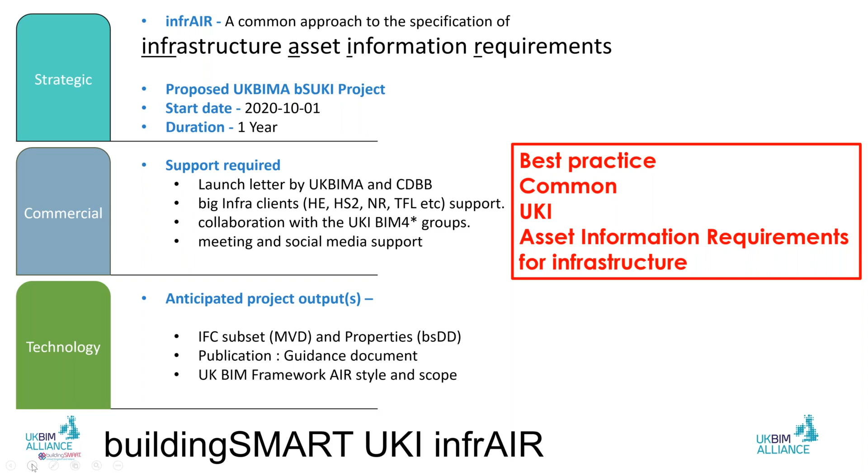Thanks, Nick, a really helpful update. And again, as you'll be getting used to on these Assemble events, a call to action, a call for help, involvement or engagement, similar to the airports - if you are involved in the airport sector or anything to do with infrastructure, get in touch, because we have activities going on right now to help you guys. We don't want to be in a position where something is changed and added to the schema and you say, well, we didn't know about this, we didn't have any input. We're asking for your input right now, and we're really open to doing that.

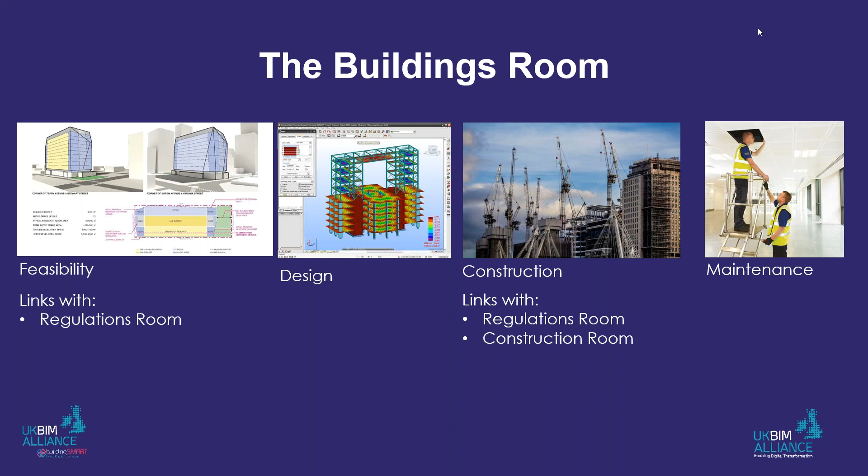We're very much community-focused rooms, and this is really the call to arms to people listening to this presentation - please get involved with us, either directly or via the BIM4 groups as part of UK BIM Alliance, the community groups which have an interaction with buildings. There's a number of those community groups with interaction with buildings, and also the affiliates program - some of the institutions will be focused on buildings, and we're really interested in growing this dynamic group who are interested in pushing open BIM with relation to buildings across the life cycle.

So quickly just to run through a couple of the projects we've got on in the buildings room, and you can see these again range across the life cycle of buildings. MVD, for those who aren't aware, stands for Model View Definition - it's basically a subset of the whole IFC, which involves, for example, quantity takeoff. We saw that great presentation earlier of how 5D modeling is so important to buildings and all projects, so this is a project around quantity takeoff assessment. There's also a project around energy simulation and how we can transfer information from IFC, from geometry, towards technical simulation.

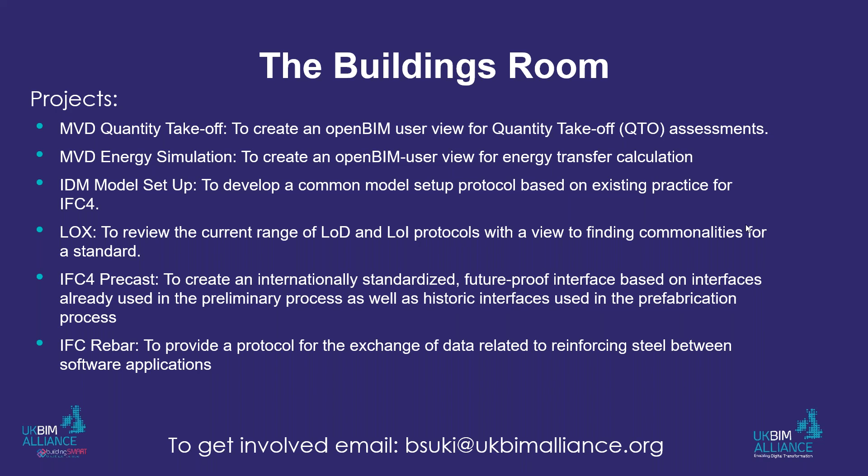There's two projects which cross over with the construction phase: IFC for precast and IFC for rebar. Both projects involve looking at interaction between precast concrete and steel reinforcement. We're also involved in IFC for site, landscape, urban planning to look at those areas that interface with buildings, and then design for manufacturing assembly, lean construction, and this IDM configurator, linking this human readable information delivery manual and the model view definition.

Moving forward, we've got a project on the horizon which is COBie 2.5. This was submitted in July with the idea of replacing the handover view in COBie 2.4. The attempt was to make COBie as lean as possible and fix the minor issues in COBie 2.4, and also move away from the express-based schema to a unified modeling language, which will be compatible with the IFC updates to the IFC schema.

I'll touch on that a bit later in the project for the technical room. There's a link to a video here - I'm not going to play it, but the link's in the presentation if you want to go on. That's a link to Bill East, who was heavily involved in the creation of COBie, talking about his views and his desire for COBie 2.5.

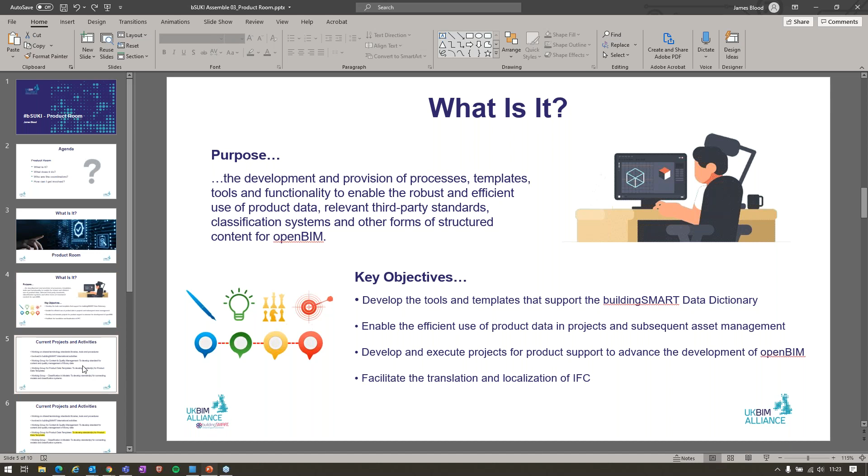And we're here to facilitate the translation and localization of IFC, allowing national domains to play together nicely in the international arena. So that's what it is, what its objectives and what its purpose are. So what is it up to at the moment?

They're currently working on shared terminology standards, libraries, tools and procedures. They're involved at the buildingSMART international level on internal activities there. They are working towards developing a standard for content and quality management of library data, which, as Peter highlighted earlier, is critical if you want to get those efficiencies and interoperabilities with the toolkit you want to deploy on your project. So there's a working group currently working towards that.

There's another working group for product data templates. I've personally been looking at PDTs for almost 10 years now. I was involved early with the BIM4M2 movement. There were lots of initiatives both within the UK and internationally around defining PDTs. But obviously, if we're going to work both within the UK national domain and then broaden that out internationally, the standards and definitions of those PDTs and the properties that sit within them need to be standardized at the international level, which has been happening.

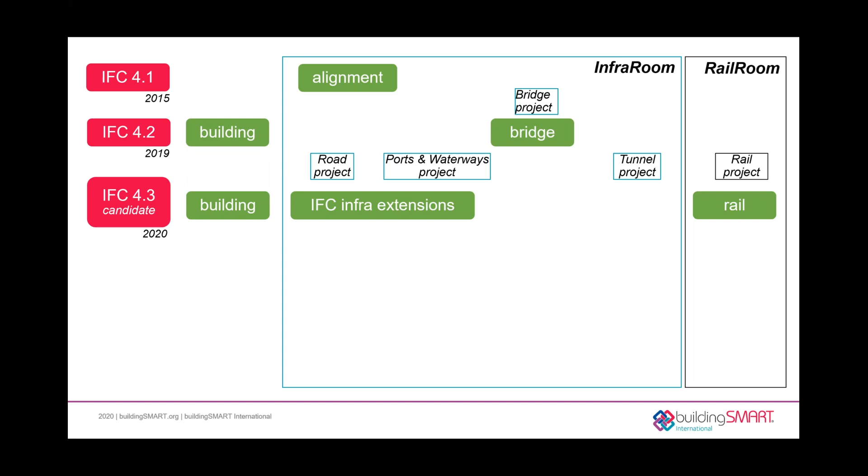In parallel, rail was being developed by the infra room, but the rail initiative was spun off into its own separate rail room, principally because there was high investment from parties in the German-speaking countries, French-speaking countries, and most importantly from China, who had released an IFC candidate for rail in 2016. So the rail room operates separately, but in cooperation with the infra room. All of these are leading to a candidate IFC 4.3 standard that has been released, which has what we call the infrastructure extensions - extra bridge, road project, ports and waterways, and the rail extensions. It doesn't include the tunnel extensions at the moment.

We are currently in what we call the extensions implementation pilot projects, and I'll speak a little more about those shortly. So we are at this point where we are testing the improved alignments, road features, ports and waterways features, and extended bridge features, as well as rail components. Once this testing is complete and this IFC 4.3 candidate is proven to be suitable, it will release the IFC 4.3 production standard, and that's the one I would highly recommend anyone who's interested in IFC for infrastructure and rail to consider supporting. At the moment, these are not verified or certified standards, so you would use them at high risk if you did try to implement them.

But once the testing is completed and we can start supporting them in verified software, then IFC 4.3 should be a very valuable standard for those of us in the civil infrastructure world, because it will have a consistent schema for road, ports, bridge, rail, and additional extensions to buildings.

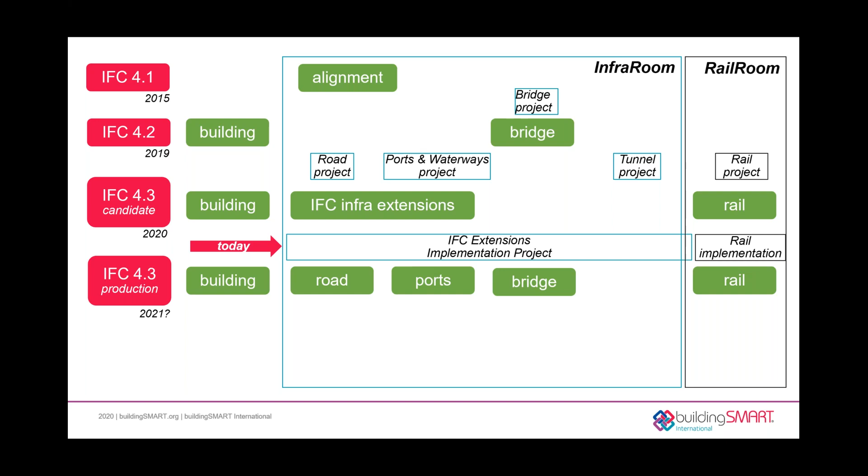All of this is also being done in parallel to an ongoing IFC 5, or whatever it might be called, core schema project, possibly due for release in 2022. Hopefully that will also incorporate any amendments and improvements to all of the above initiatives, and will in itself also include the tunnel project.

That work is some way off, and it could actually have quite a dramatic change to how IFC is delivered to users. But safe to say, currently we are working on the IFC extensions and rail implementations project.

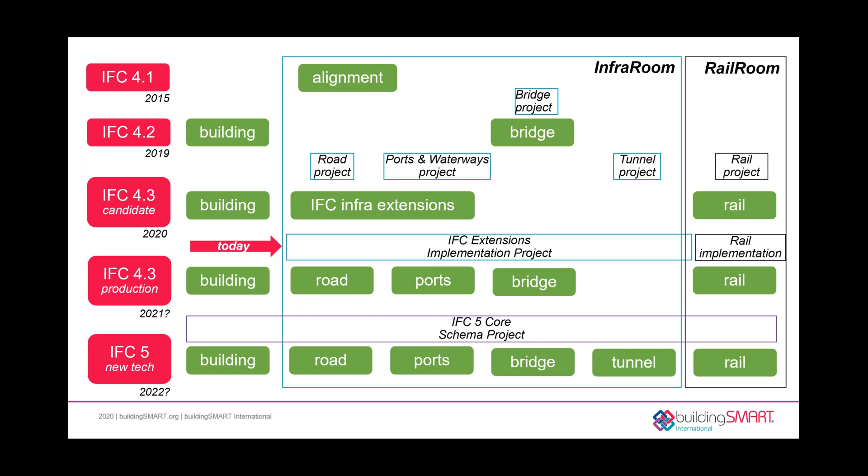Similarly, there's been quite a few experts coming in from the US as well, particularly on bridge, because interestingly, the US has already made a request for bridge exchange by departments of transport using IFC. Initially it was using the IFC 2x3 schema, but now moving towards the IFC bridge 4.3 version.

And then there are others. We've had a presentation already from the Skanska Costain Strabag team, and Dave Owens from Costain has volunteered to get involved in some of the work as well, and Lawrence Chapman from Network Rail is also on this, and he's willing to put forward some candidate Network Rail scenarios for testing.

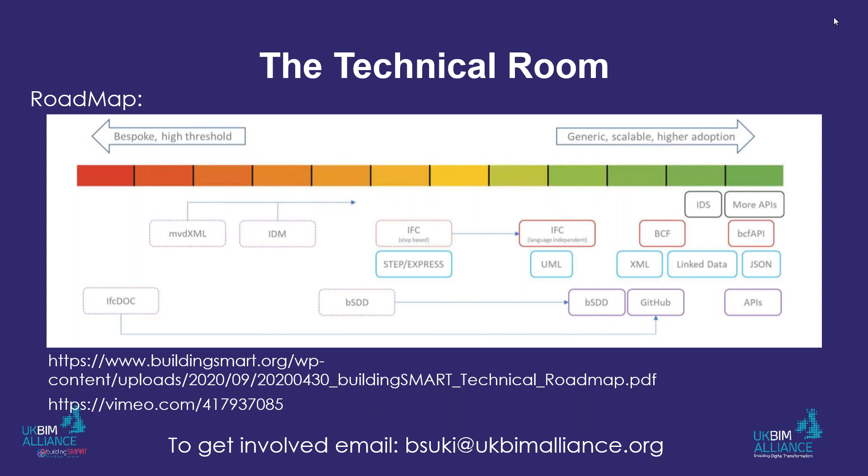That's very much around trying to take the existing technology that IFC 2x3, IFC 4 is based on, and move it into some of the evolving technologies that are out there at the moment, particularly around JSON and unified modeling language. And you can see these - this is an interesting graphic that I took from this, moving these existing products to the right, where they become much more generic and much more accessible to the current technology. A very, very quick run through on a future project that's just about going through pre-development phase on OpenCDE.

And this is this idea of how do we get CDEs, common data environments, to actually talk to each other. There's been a sort of a start of this with this BIM collaboration format, but there's been issues with that. So we've now developed this server-to-server technology based on both implementing property exchanges between attributes within different CDEs, and also this Open Doc API, which allows the exchange of documents.